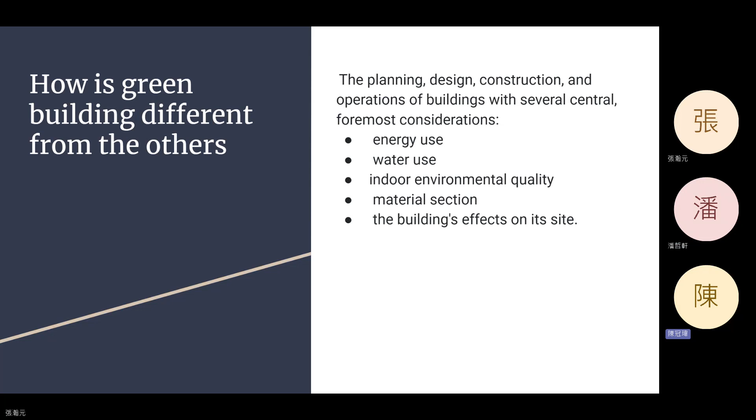So they don't just build the building for their needs. They care about the impact on the society and the area. So we're talking about three cases. The first one would be the Bullitt Center in Seattle, USA. The second would be Harvard House Zero, and the third one would be the Crystal.

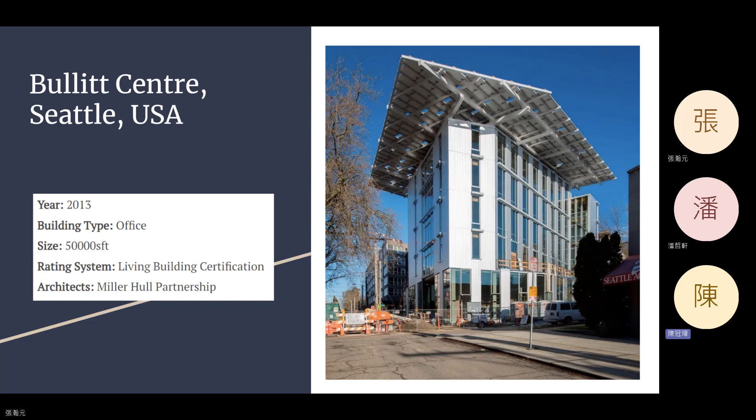So for the Bullitt Center, Seattle, USA case, it was built in 2013, the type of building is office, the size is 50,000 square feet, and the rating system is the Living Building Certification. Next.

Next. Okay. So there are six features that I would like to introduce. The first one would be net zero energy use. The second would be solar panels, the third would be heat pumps, the fourth would be heat recovery ventilation, the fifth would be regenerative elevators, and the sixth would be rainwater harvesting.

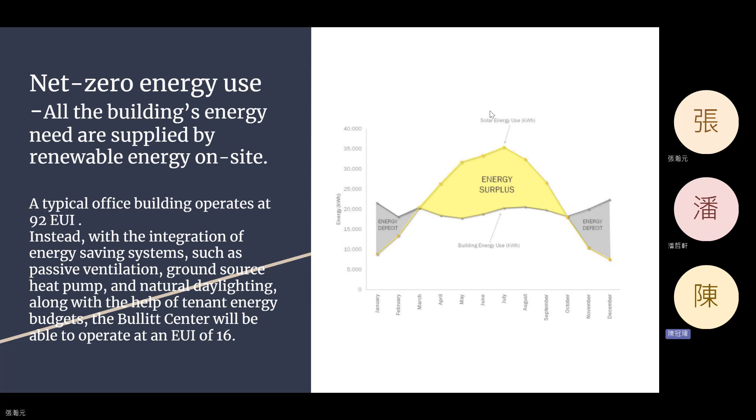So in the summer, they produce more energy, and they transfer the energy to the power grid. And in the winter, when they don't produce so much energy, they get energy from the power grid. However, over the total year, when we sum up the energy, there is net zero energy use. Next.

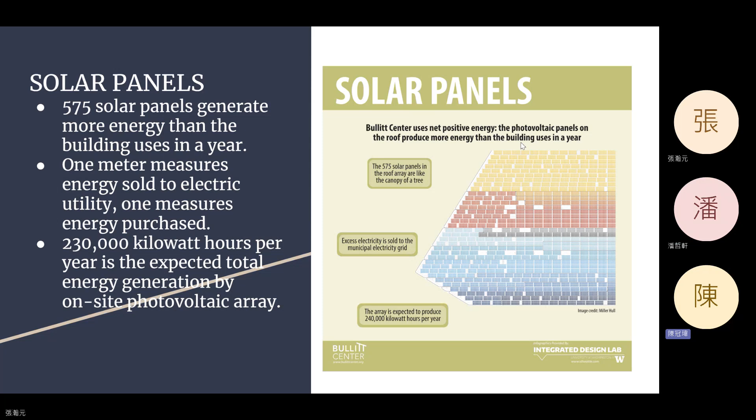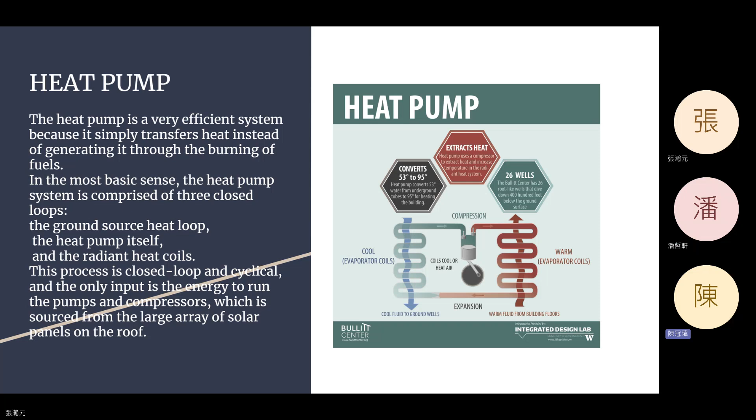The heat pump is a very big feature of the building, because the weather could be cold in the winter, and the heat pump helps keep the building warm, which reduces the consumption of surplus energy. Next.

The heat recovery ventilation provides fresh air, and uses tempered exhaust air from the building to heat the incoming air. It has a special honeycomb heat transfer wheel that turns slowly to maximize heat transfer and prevent cross contamination. So the fresh air doesn't get contaminated by the exhaust air, but it gets warmed by it. It is approximated to transfer 65% of the heat. Next.

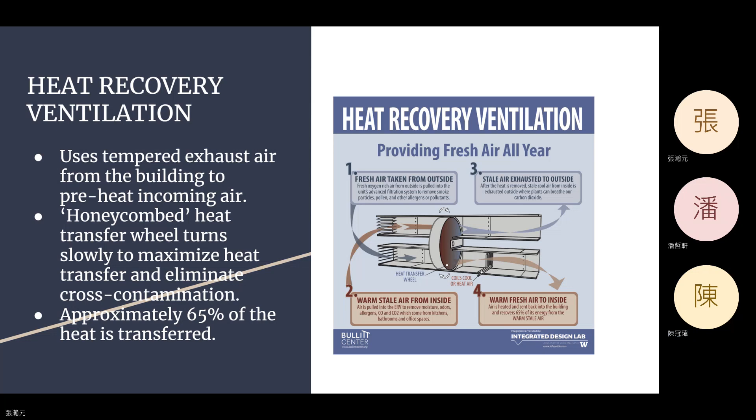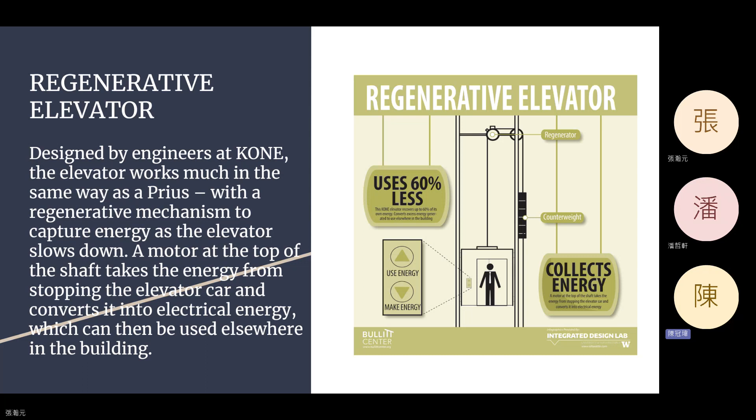So the next feature is regenerative elevators, which were developed by engineers at Kone, which is a company. The elevator works like the Toyota Prius, generating energy when the elevator slows down, turning this energy into electricity. Next.

The last feature I would like to talk about is rainwater harvesting. 100% of the water used in the Bullitt Center comes from rainwater. So they don't have to rely on other facilities or get water from outside sources, and it is more environmentally friendly.

And the grey water is treated and reused in a vacuum flush toilet system, which makes the most use of grey water, saving water and making the environment cleaner. The next would be my partner's part.

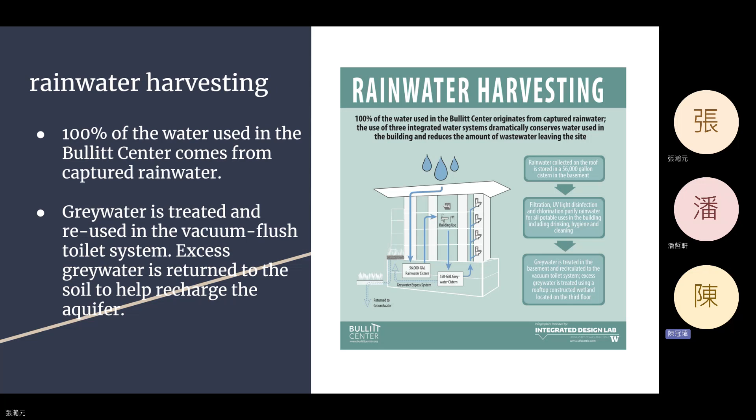Okay, so I'll be talking about the Harvard House Zero project. It is a project where a group of students revamped a house and turned it into an energy saving house with intelligent methods.

So it has four main targets. The first one is zero energy required for heating and cooling. The second one is 100% natural ventilation, the third one is 100% daylight autonomy, or no daytime electric light, and the fourth one is zero carbon emission.

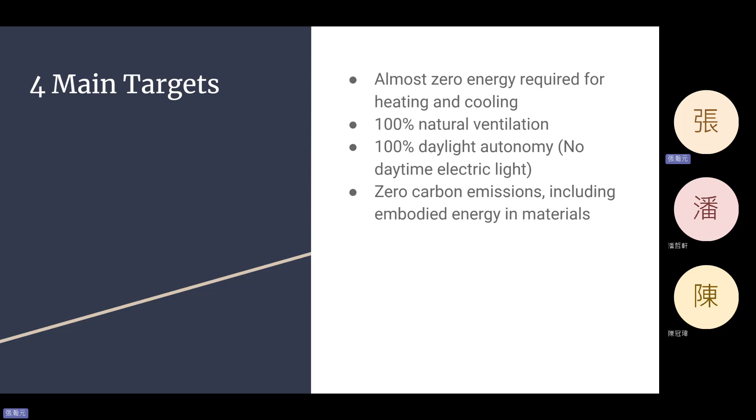So to achieve zero energy for heating and cooling, they implemented a method called data-informed building energy management, which we'll be talking about at the next slide. And for the extreme conditions, they implement the geothermal heat pump for extreme hot or cold conditions. And the solar strategy is also implemented, like the specially shaped window shrouds to, for example, block the sunlight in the summertime to reduce heat in the house.

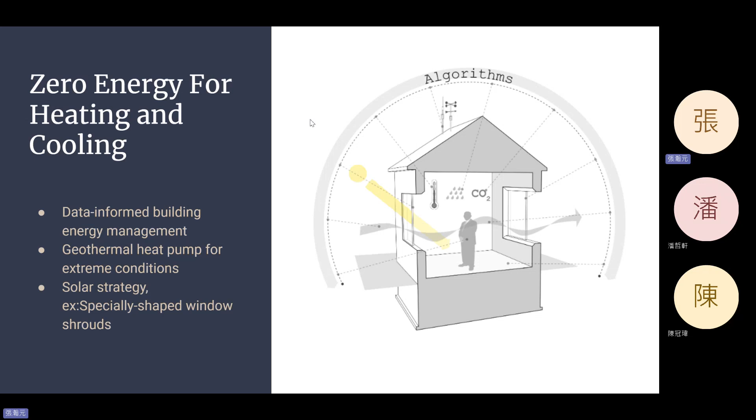And the data-informed method is like you have the environmental data, like the temperature of the outer environment, the electric usage of the house or the hot water in the house, and the house will collect the data and try to predict how things will go, and then they can operate the systems like the windows or the heating or the geothermal pump heating systems. So they can reduce the possibility of overcooling or overheating during day and night.

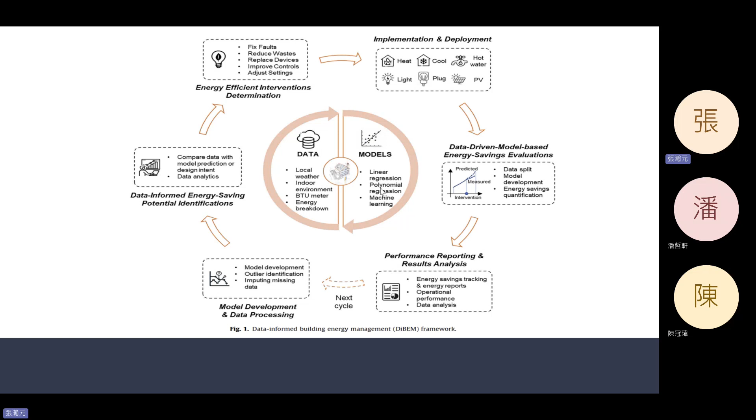And the natural ventilation is achieved by controlling the windows. They have automatically controlled windows to make use of the natural flow to help ventilation. And for the underground levels, they use solar vents. The sunlight will heat up the upper part of the solar vents, and the air at the upper part will go up and bring up the air in the underground levels to achieve ventilation.

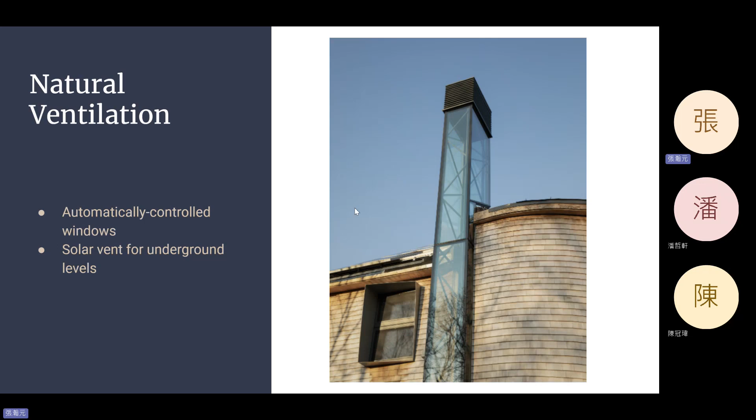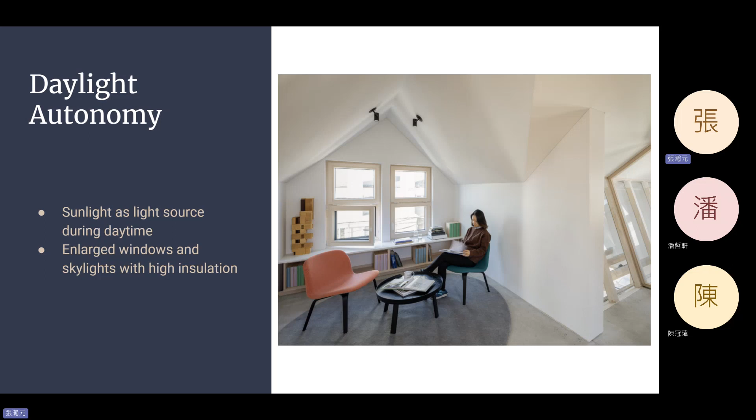And for daylight autonomy, they make use of every inch of the sunlight during the day. So they implement large windows and skylights, but with high insulation to make sure that the temperature in the house is stable. Okay.

Next, I'm going to talk about the Crystal. This is a building in London. This was previously an exhibition center and is now the City Hall of London. Next. So the Crystal is quite a green building. Compared to a standard building, it reduced 42.6% energy consumption and reduced 71.1% greenhouse gas emission. And it used techniques like triple glazing, natural ventilation, chilled beams, heat pump, and solar panels. This technology helped to make the building green.

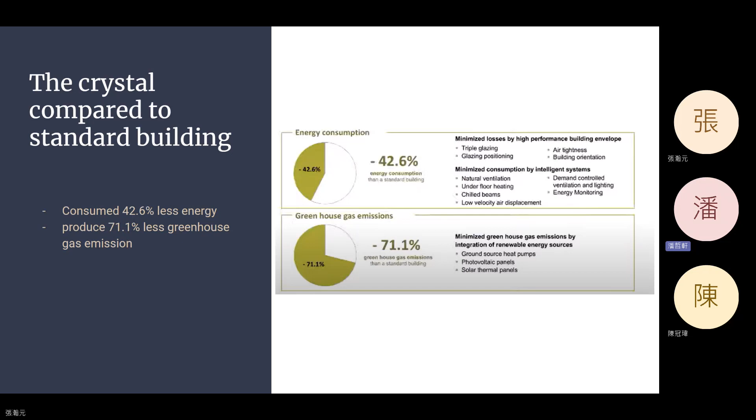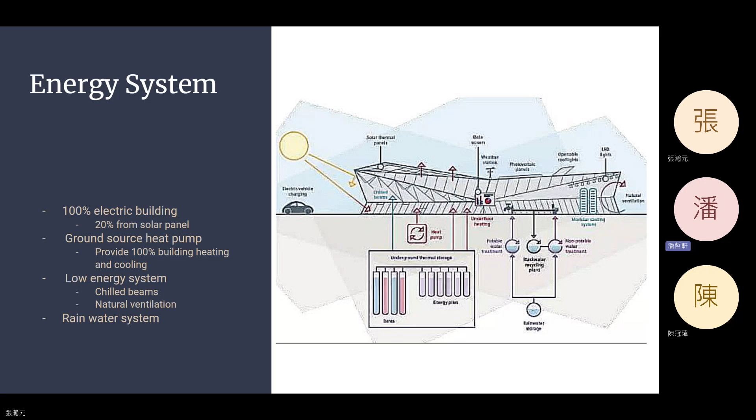Next. So this is an overall system of the building. It's a 100% electric building. 20% of the energy comes from the solar panels on site, and the rest comes from the power grid, from green energy. And it uses a ground source heat pump to provide 100% of building heating and cooling. And for reducing energy use, it uses systems like chilled beams and natural ventilation. And it also has rainwater systems to recycle the rainwater and make use of it. Next.

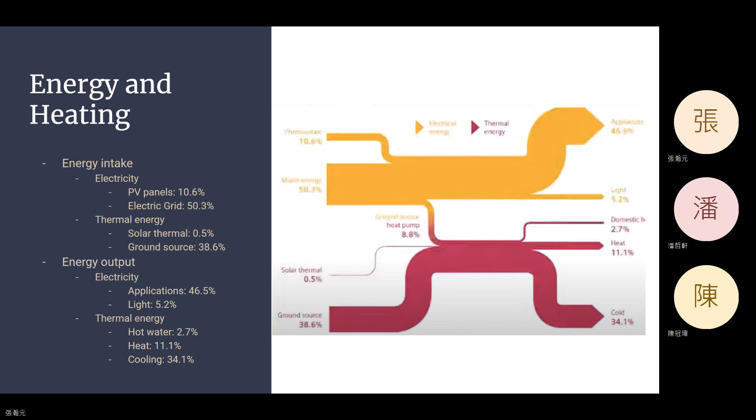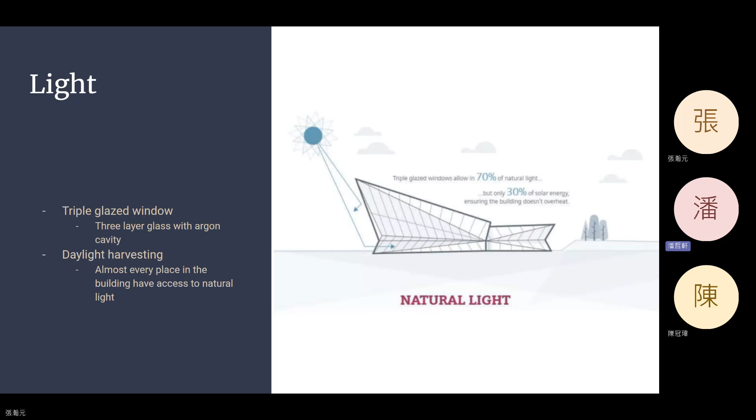So for light, they have developed some special techniques. It uses triple glazed windows. It is 3-layer glass with argon cavities, and those windows allow in 70% of natural light, but only 30% of the solar energy comes in. And it has a special design for daylight harvesting. Almost every place in the building has access to natural light. Next.

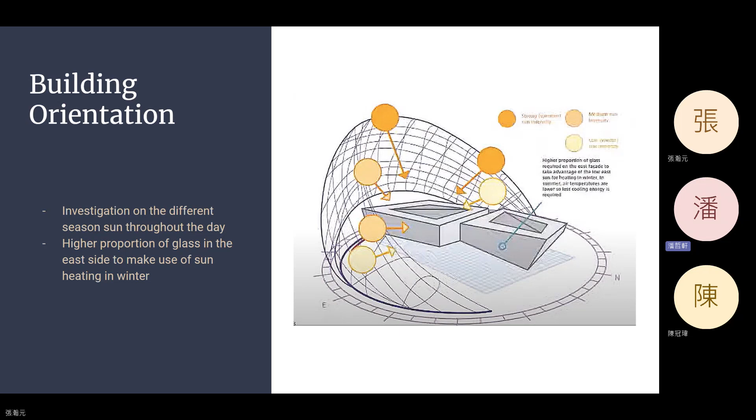So I think something interesting is that it also has a design for building orientation. It investigated the sun orientation in different seasons throughout the day. And from the investigation, they came up with the result that a higher proportion of glass on the east side is used, and this can make use of the sun heating in the winter. Next.

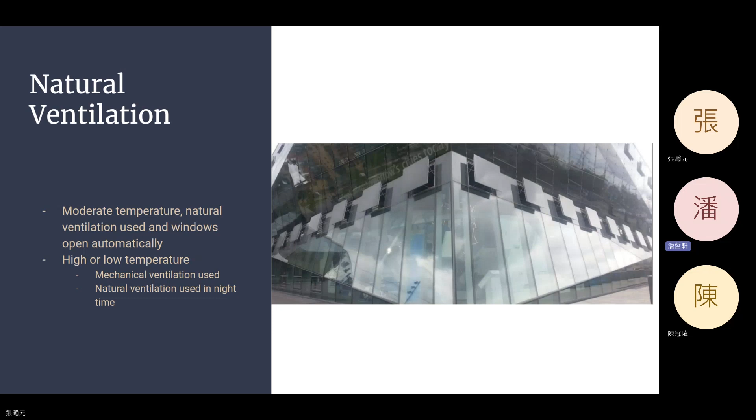And it has a design for natural ventilation. At moderate temperature, the windows will automatically open and natural ventilation will be used. And for other temperatures, like high temperature during the day, mechanical ventilation will be used, and natural ventilation can be used at nighttime when the temperature is cooler. Next.

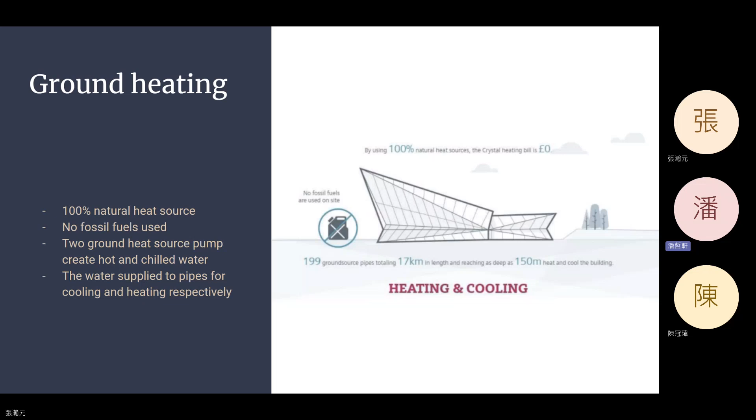So it also has features like ground heating. It uses 100% natural heat sources. No fossil fuels are used. And it uses 2 ground source heat pumps to create hot and cold water respectively. And the water is provided for the building's cooling and heating. Next.

Okay, this is the end of our presentation. Thank you for your time.